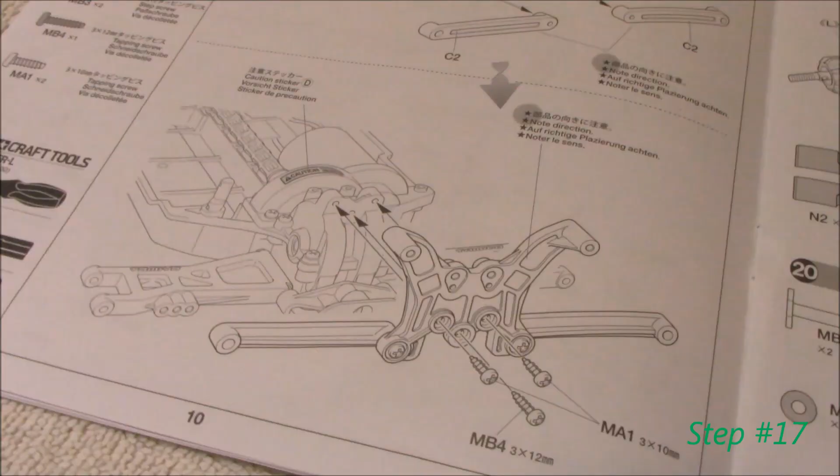Okay, so for step 17, we're going to need these parts right here.

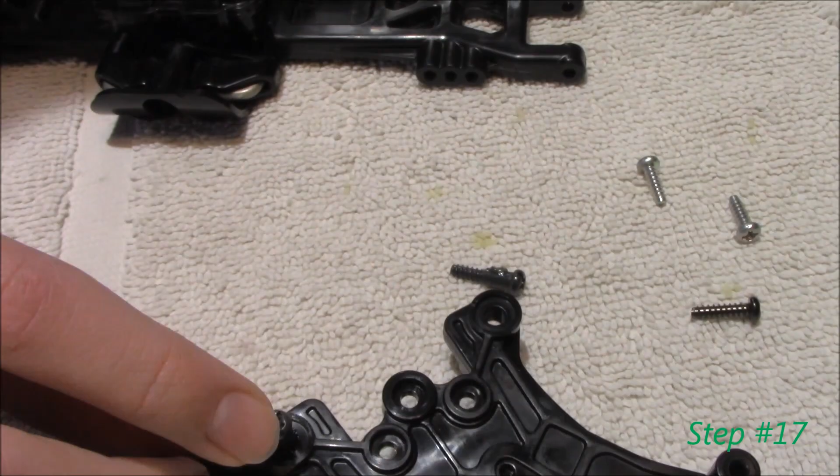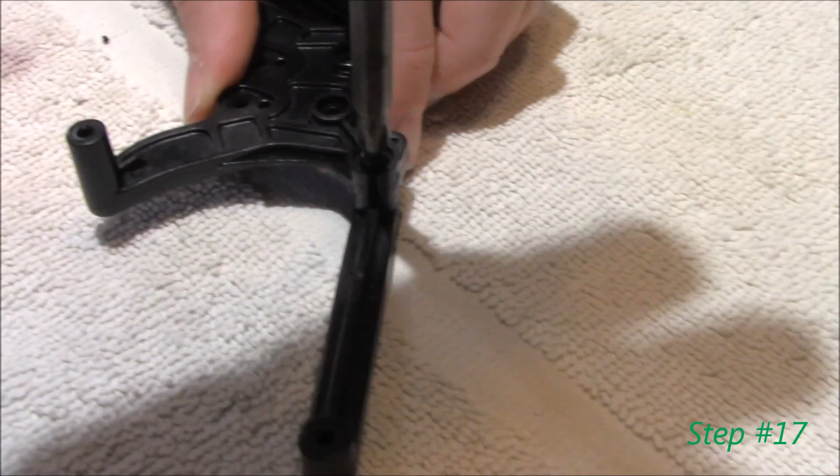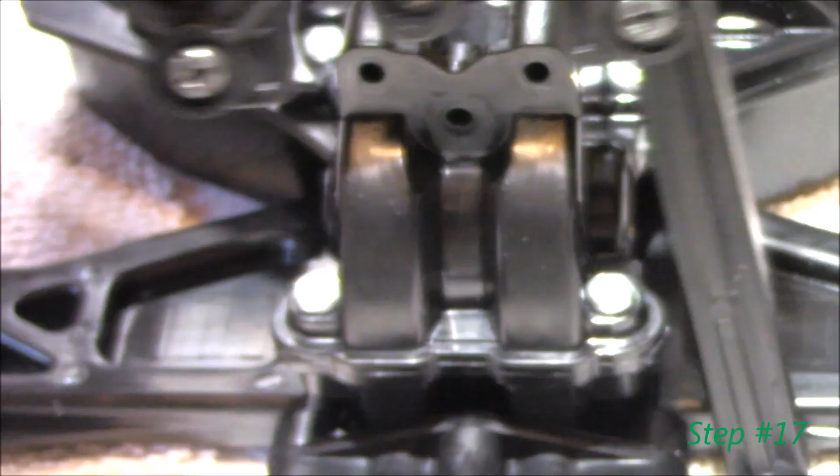Get the shock tower mounted to the back of the vehicle. The black one goes right in the center there, okay? It's a longer screw than the other ones.

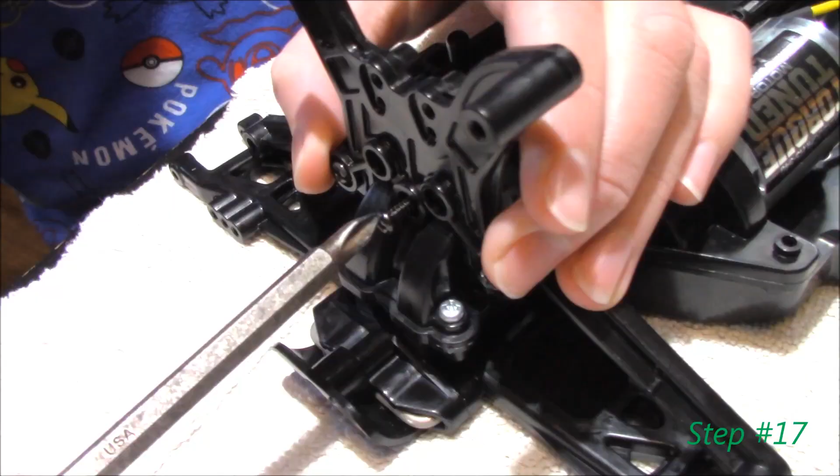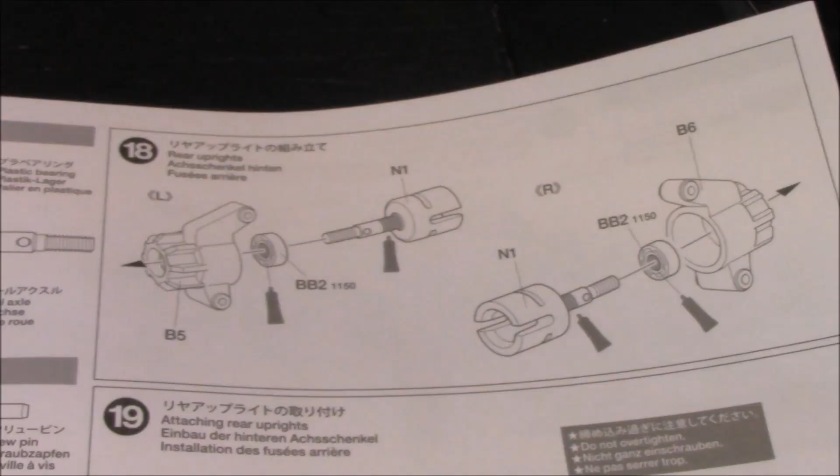Our next step is to go ahead and get the rear uprights put together. Alright, next we're moving on to step 19, which is attaching the rear uprights, the dog bones in. First thing you gotta do is grease everything up.

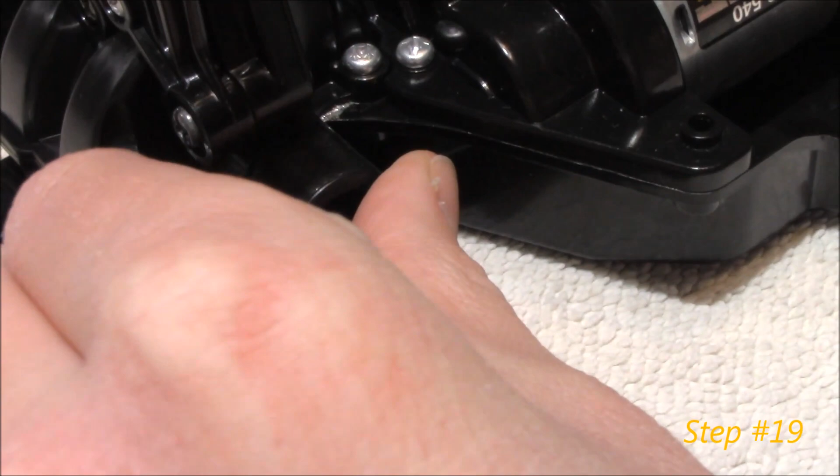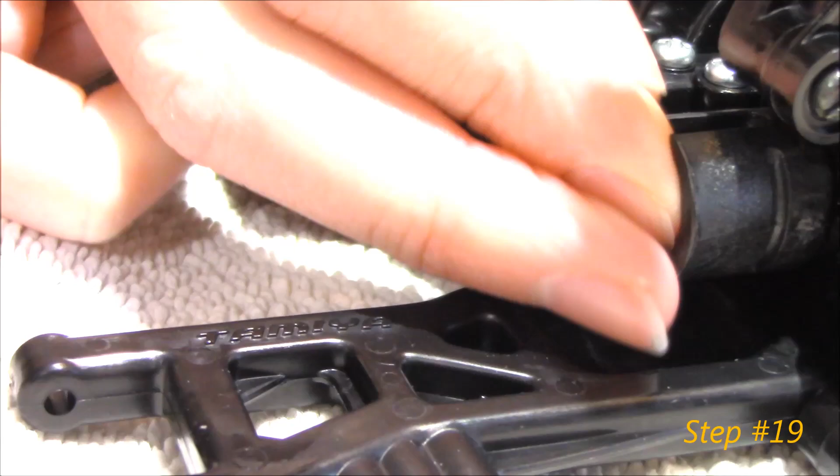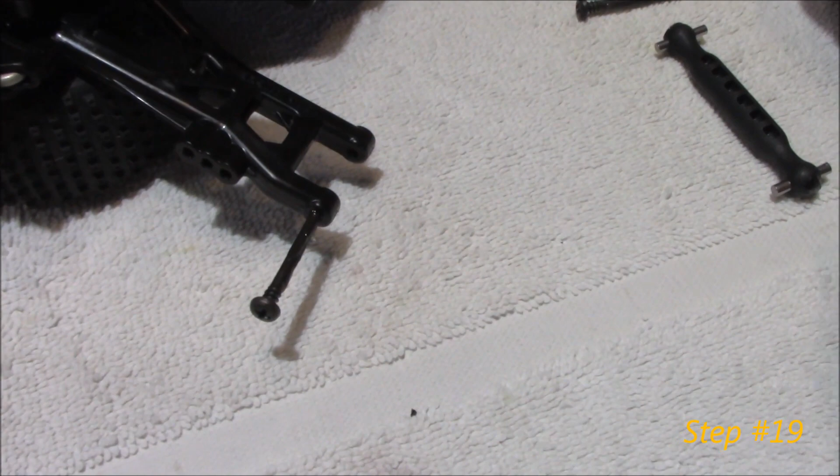All right, go ahead and get that back hub put on, the right one. Get that back one, you got to make sure that they're the right way, that you've got it right there. Okay, go ahead and get that dog bone in.

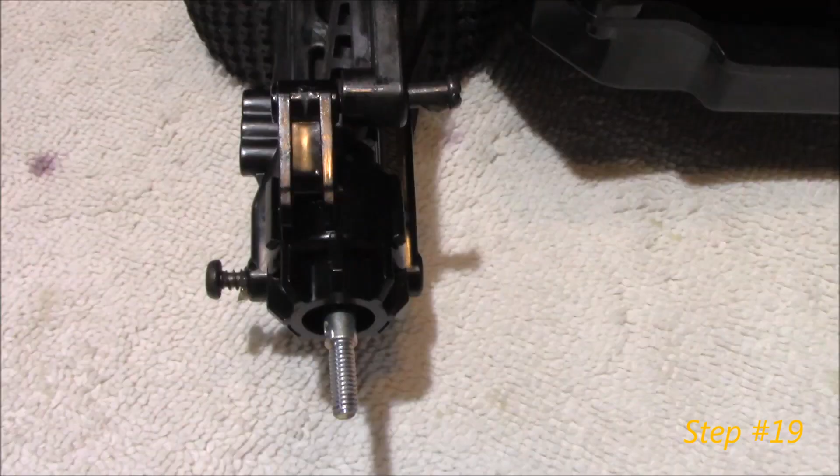Okay, get your screw in that one. We'll get that tightened down. So now you can see if you don't have the right hub in there, it won't line up with this upper arm. So make sure you check that.

Now we'll go ahead and we'll get the other side done.

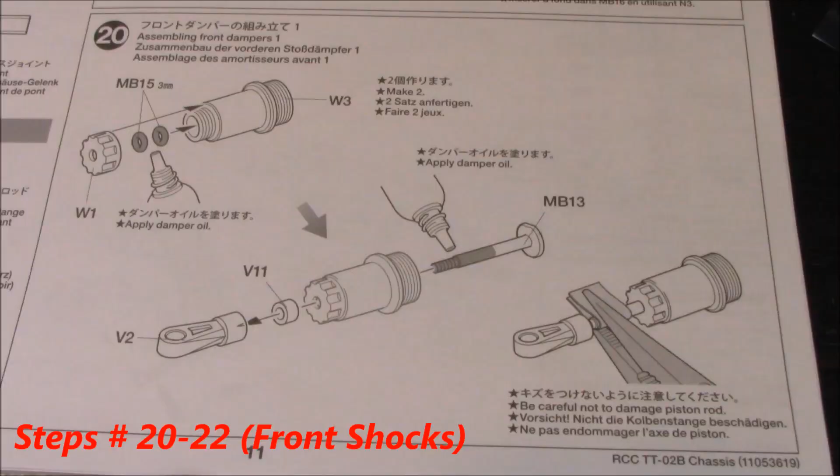So let's go ahead and get all the shock parts rounded up, Nathaniel. And here's all the parts you're going to need for step number 20, which is to build the bottom half of the front shocks.

Put a little bit of oil on that. It tells you to oil the shaft. Seals in there.

Alright, got some oil on that. Pull that through.

This tool here, but if you don't have it, you could just use your pliers like it's telling you with a towel or something wrapped around it. We'll go ahead and get these tightened down.

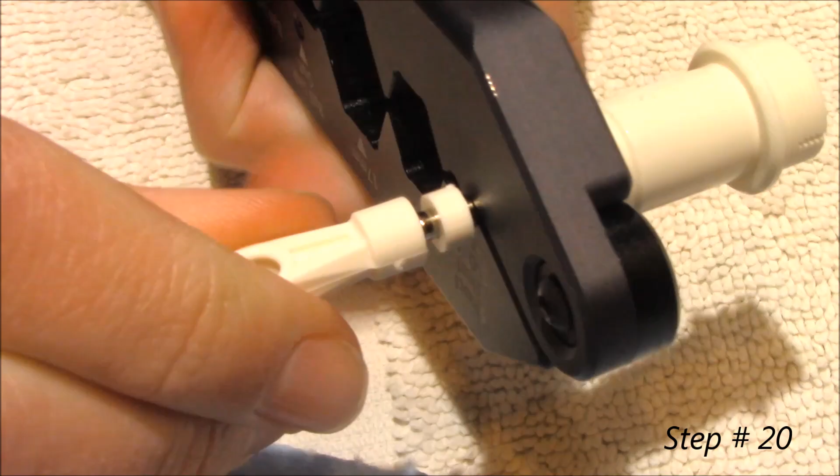We got step 20 done. Now we're going to move on to 21, which is to fill the shocks with oil and put the caps on them. So I gotta imagine this is going to be a messy step. Here's the parts you'll need for step 21.

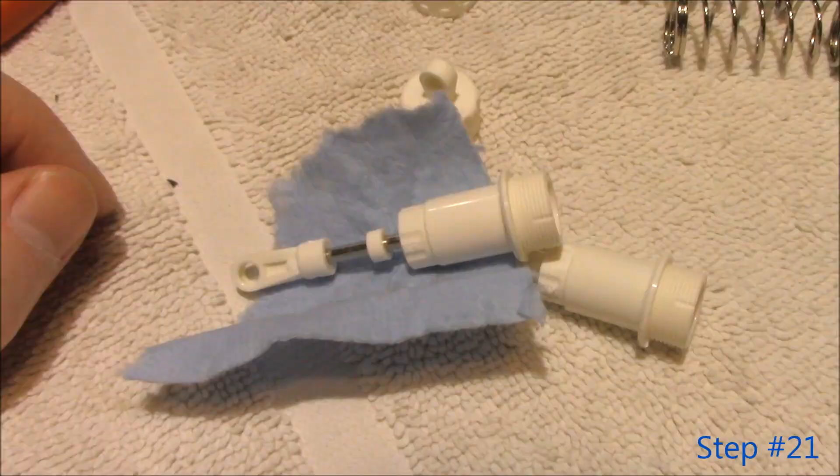Okay, so to fill these with oil, you need a rag around there. Just keep your fingers clean. Pull that piston all the way down. Go ahead and pick it up. Wrap that around there.

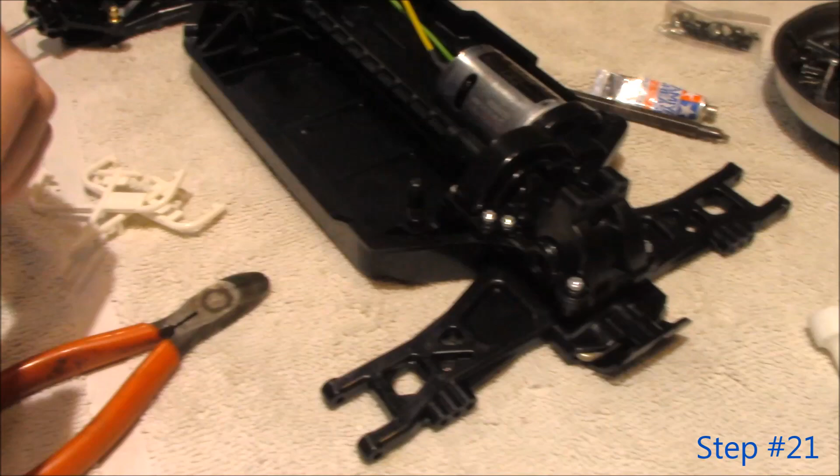Okay, now take your oil. Slowly fill that up. Alright, we're going to go ahead and move the piston up and down real slow just to see if there's any air in there that we can get out.

It doesn't look like it, so it's moving freely. So we'll go ahead and we'll put the green cap on there. And then we'll put our shock cap on there. Turn it down pretty tight, but they're just plastic, so be careful. Alright, feels nice.

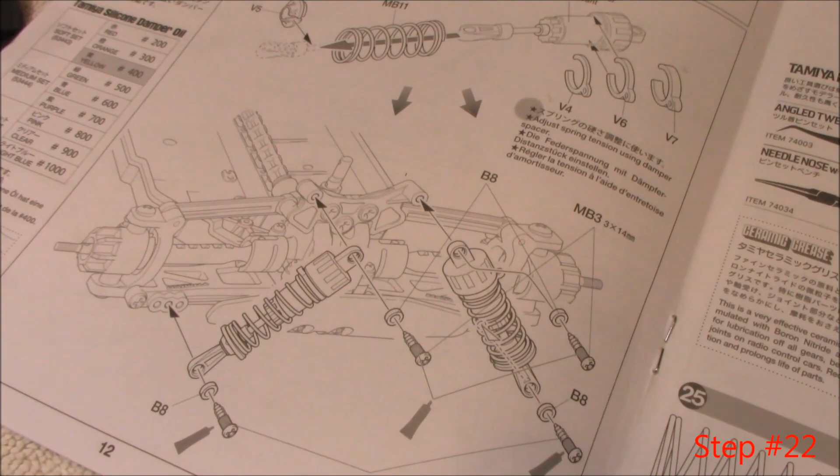Alright, now we're on step 22, which is going to be finished assembling the shocks and get them mounted to the front suspension. Okay, so here's all the parts for step 22. Let's go ahead and get the shocks together and get them mounted up. Alright, so pick it up, put that spring on there.

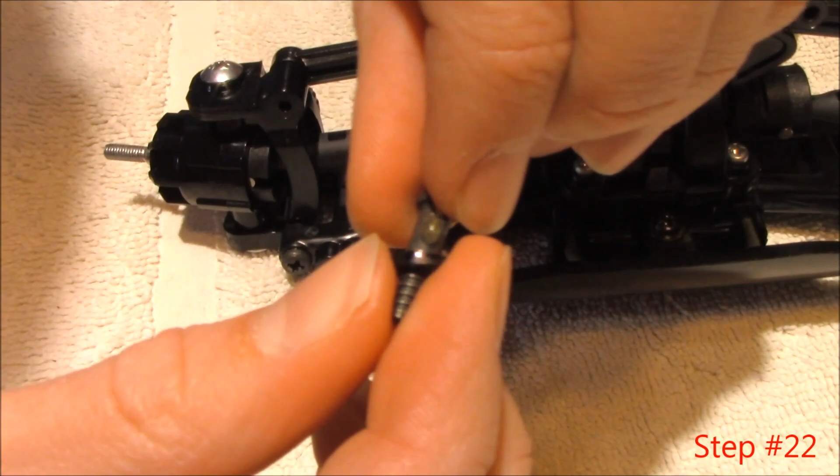Alright, we'll get that shock mounted up then.

Okay, and then the bottom's got 3 holes there. It tells you to put it on the farthest hole. We'll go ahead and put it on the most inner one. That way we get the highest ride height. This car sits really low to the ground, so might as well have as much height as we can get out of it.

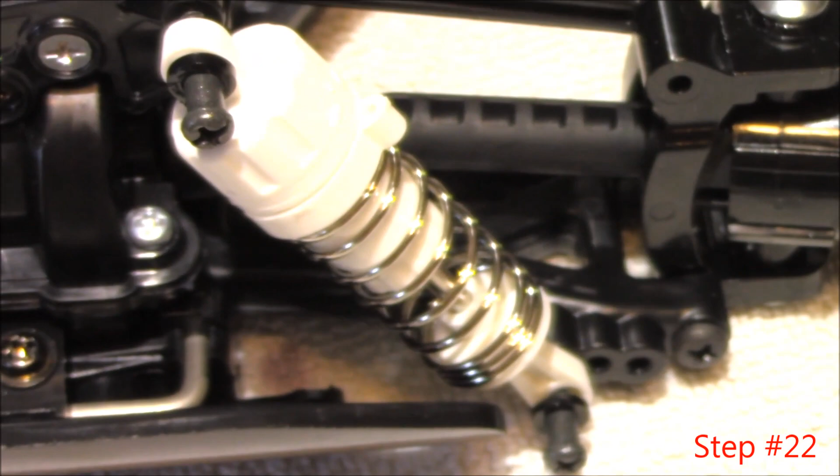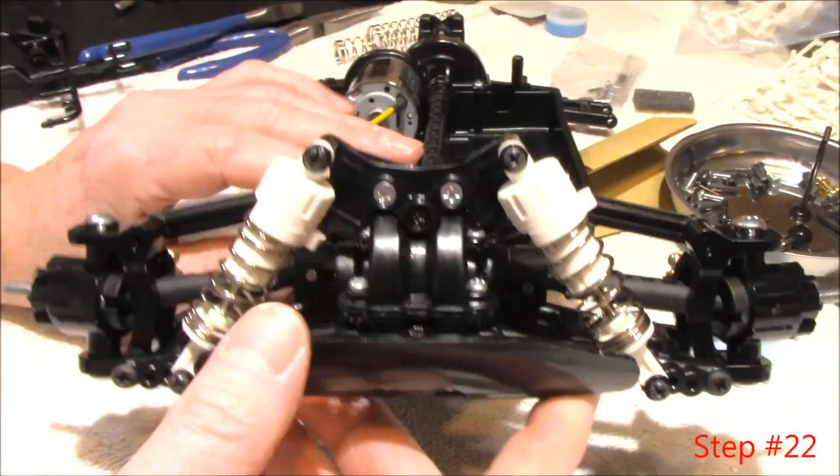Alright, step 23 is basically doing the same thing on the back, and so we'll go ahead and get the rear shocks assembled.

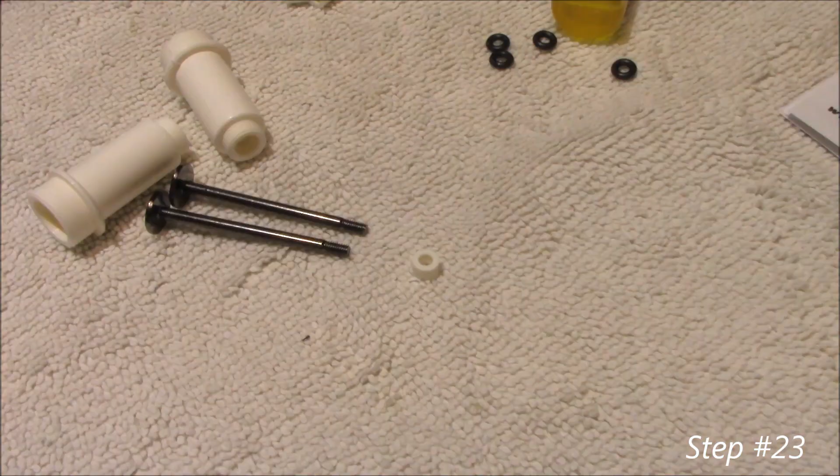So on these shocks, these get a little bushing on each shaft, unlike the other ones.

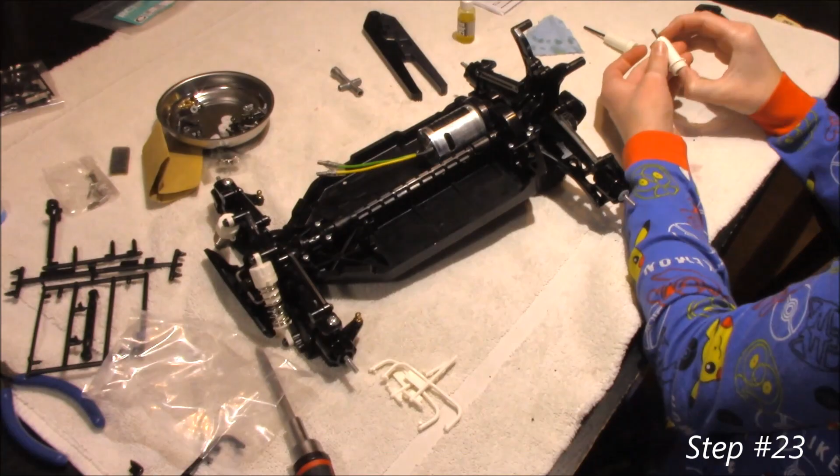Alright, go ahead and put the O-rings in the bottom of the dampers, 2 of them right on top of each other. Spacer goes on.

And now we're on to step 24, which is just to put the oil in the shocks.

Alright, now we're on step 25, so that you're going to need your springs. Okay, remember how to do this from before? Go ahead and put your spring on there.

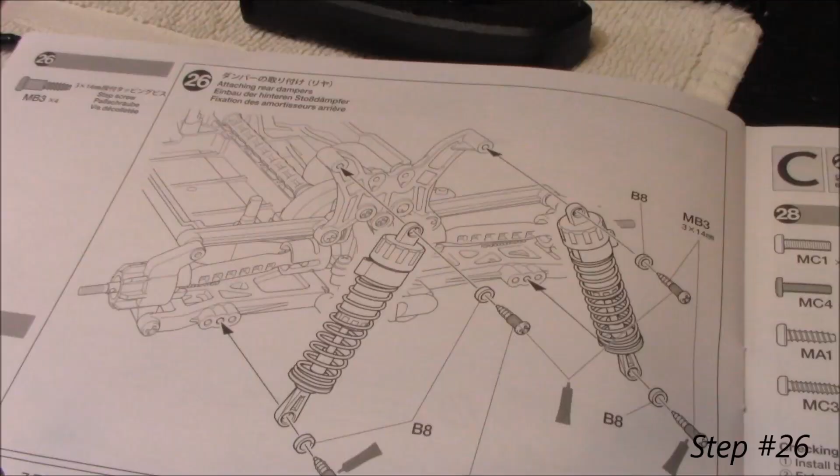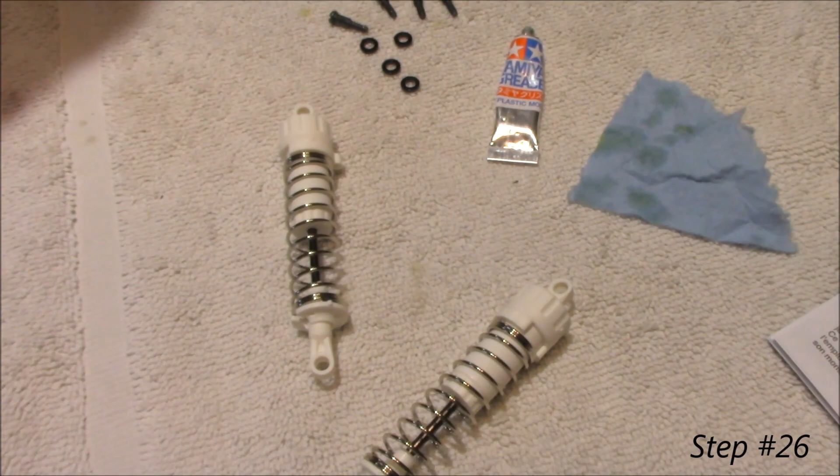Alright, step 26. We'll go ahead and get the rear dampers, the rear shocks put on the car. Here's what you're going to need, your 2 shocks and those parts right there. We'll go ahead and put a little bit of oil on those, or grease.

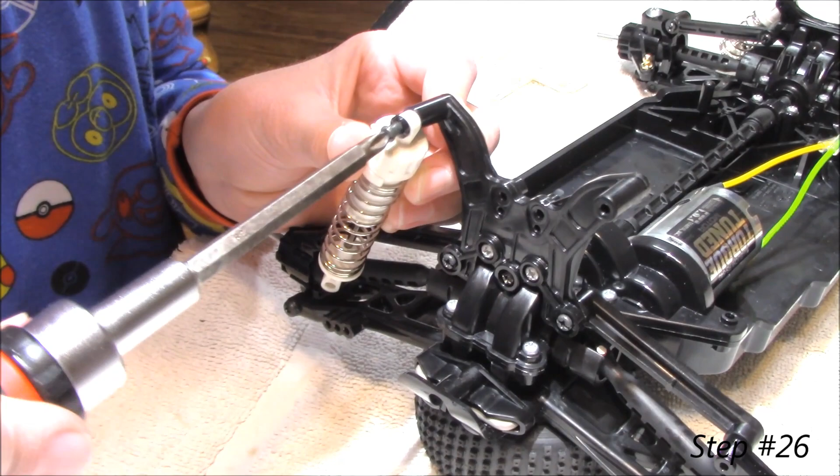Alright, let's get our damper on. You don't have to get it all the way in yet, but just tighten it so it doesn't fall off. Alright, that's good. Now go ahead and get the bottom one.

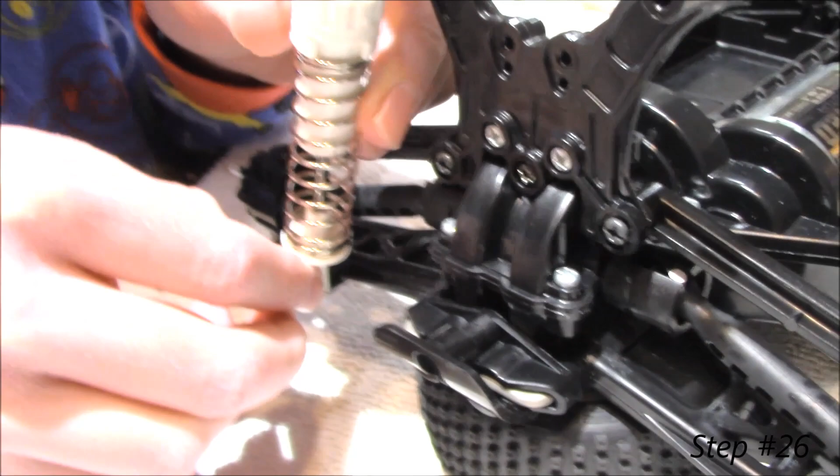We'll put it on the innermost hole right there. There you go. That'll give us the most travel. These cars sit really low to the ground, so you can always adjust it if you don't like it that way. So we'll get both of those tightened down and we'll put the other side on and do the same thing.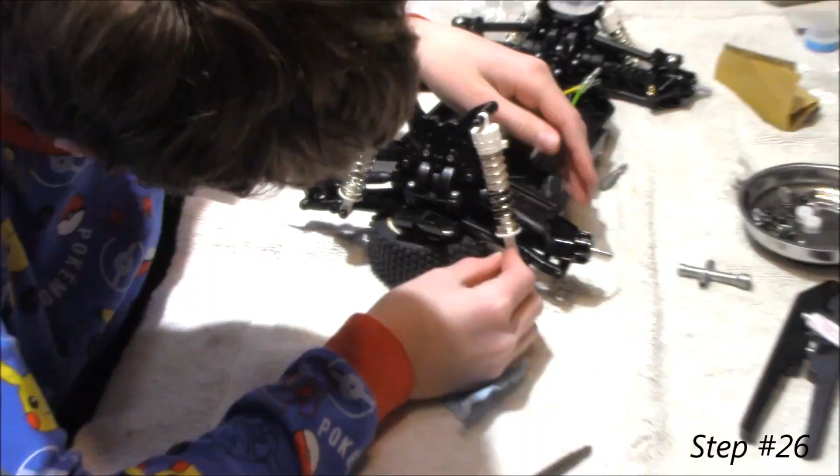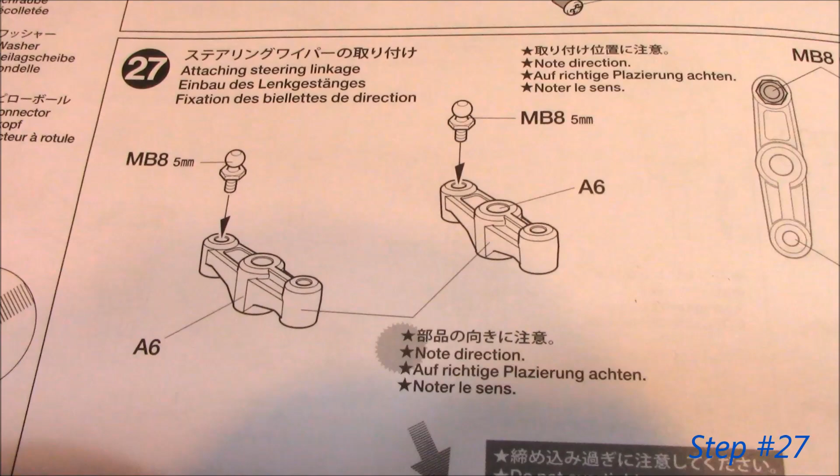Alright, now we're on to step 27, which is to put the steering linkage on there. There's the parts we're going to need, so we'll go ahead and get the little ball studs on there. For the ball studs you got to make sure that you're putting them on the steering arms in the right direction, on the right side.

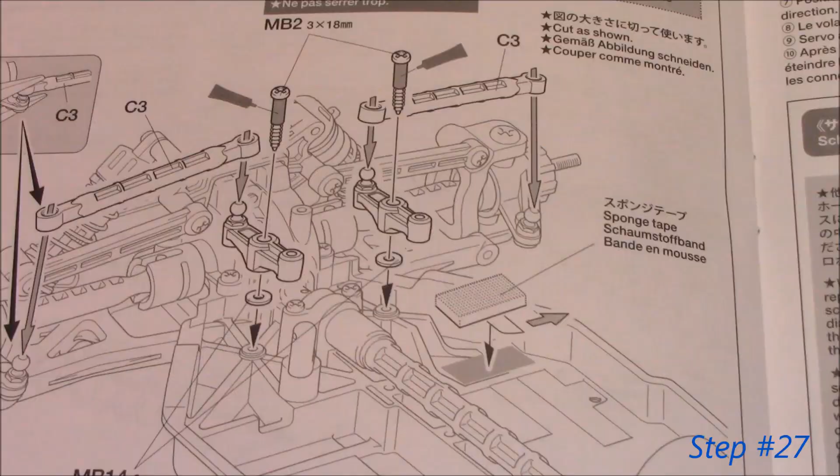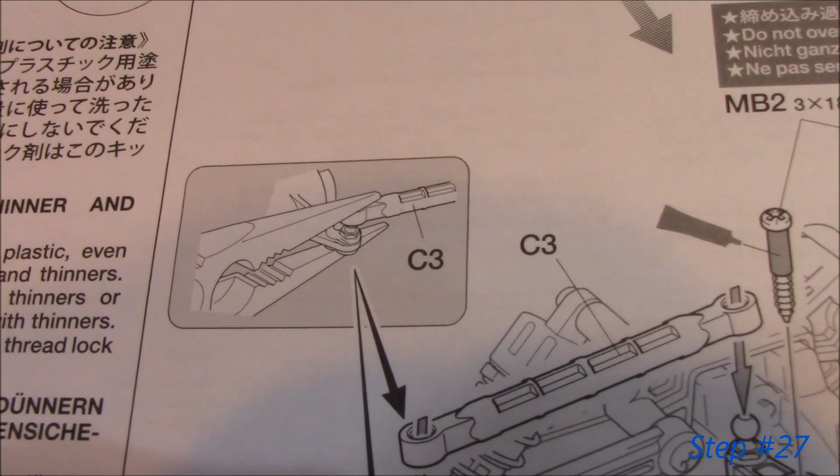So that actually started pretty easily. Okay, now we got to get that ball end into that tie rod there. Alright, so we got one attached, and they tell you to use needle nose pliers in the instructions, which is not, in my opinion, the easiest way to get them on there, so I found a pair of pliers works the best. Alright, put it in there.

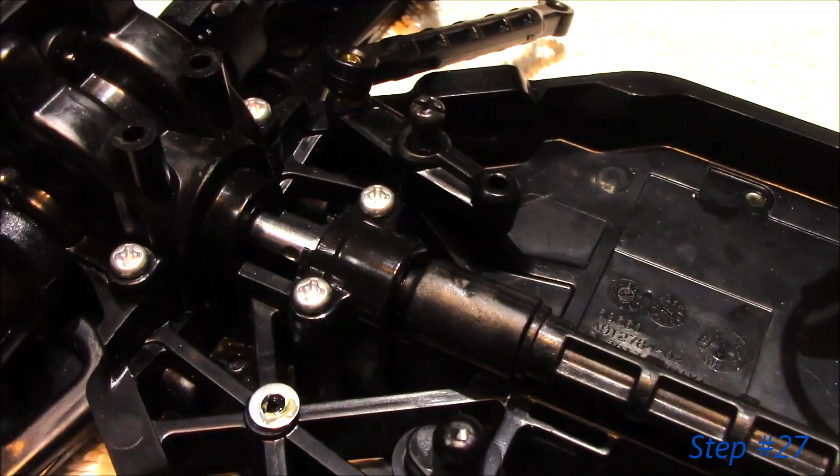Alright, I got the right linkage started here. We're going to go ahead and get the other side on there. So the first step is to put this little washer on, below that. Put your linkage on there and then feed your screw. Kind of hard to catch it on the camera, but feed the screw through that and then the arm.

It's really hard to capture, it's all black. Get her started. Now we'll screw those down.

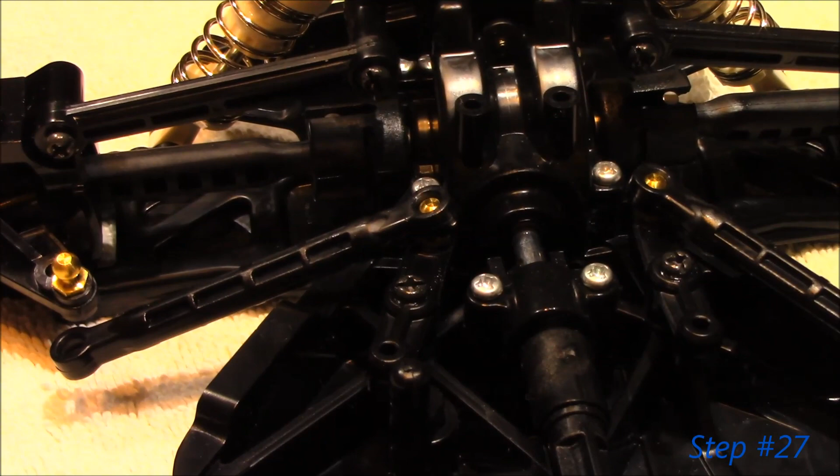Okay, so you can see that that's kind of tight, and the instructions say to loosen it just a little bit to where you have enough free play in there to where it moves freely. Okay, and the other one's kind of tight too, so we'll back it off just a hair.

Perfect. Okay, the last part of step 27 is to go ahead and attach your tie rods to your ball ends on your steering knuckles.

Alright, now we're on to step 28, which is basically to get your servo set up, and that entails getting your receiver hooked up to your speed controller and powering the system up so you can get your servo set to its midpoint, so we can get that installed in the car.

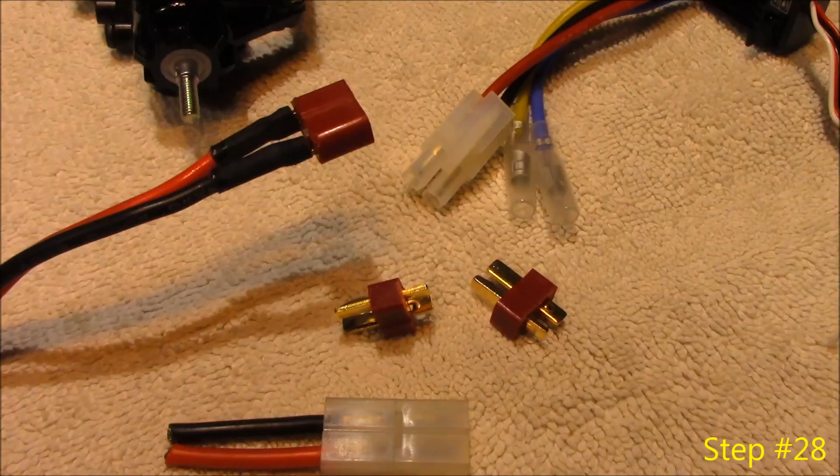Alright, so we're going to have to go outside and change out that connector on the speed controller so that it works with our Deans connector on our battery. Okay, we got the speed controller all set up. Everything's soldered on there nicely. Time to get the servo out.

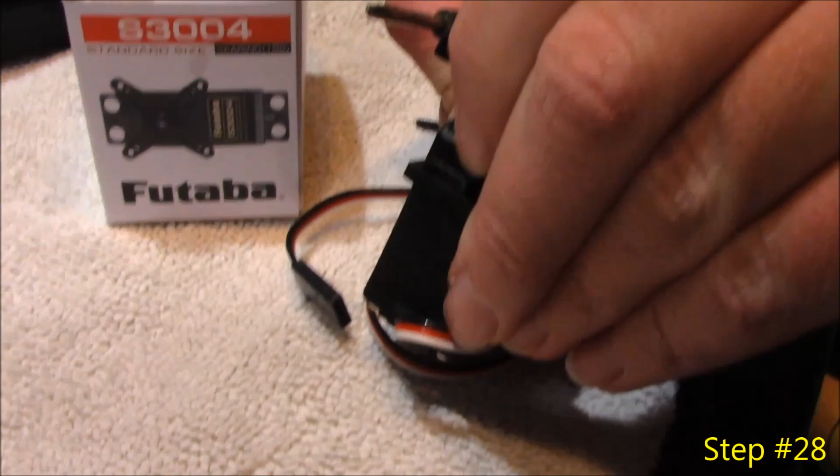Go ahead and take that servo horn that it comes with off of there. Alright, just a basic Futaba servo. This one does have ball bearings, but they're plastic gears. Should be fine for this car.

Alright, so now we're going to need our receiver. So we got that all unpacked, and we got our transmitter and our receiver here. We got to get this bound to this. Get some batteries put in it. So we're going with just a cheap little Dual RC. I've used this controller in the past and I've had no problems with it, so should be fine for this.

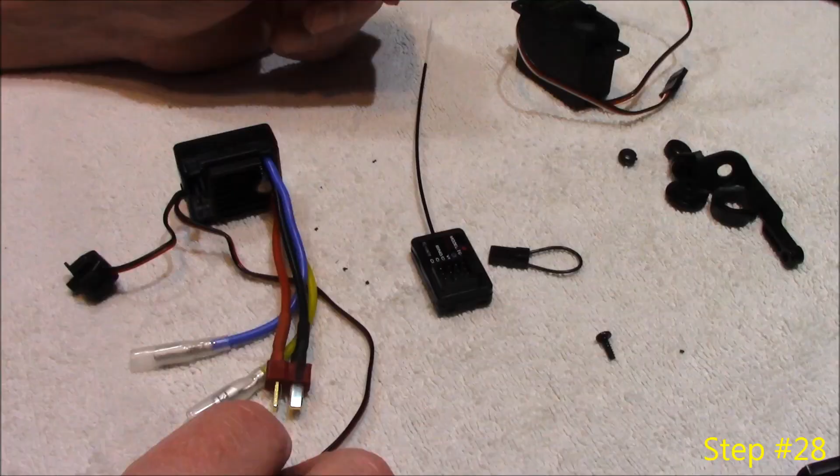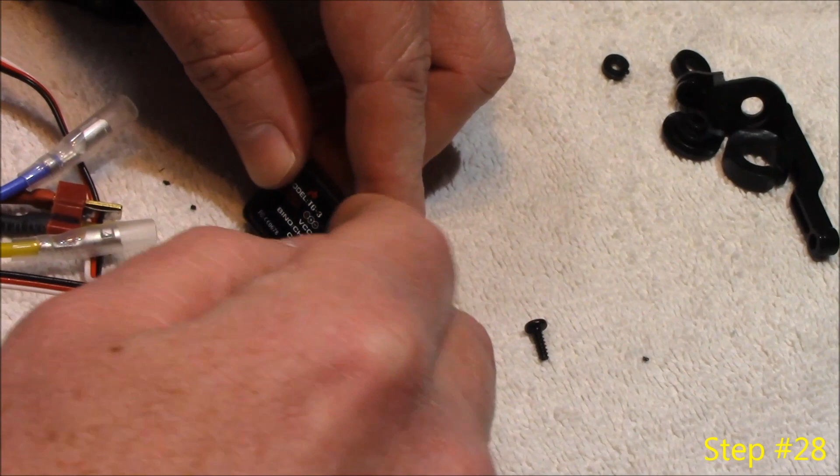Alright, so we got to get everything plugged into our receiver here before we try to bind it so we can get it powered up. Okay, we got that all hooked up. Now we got to put our bind clip in, which is channel 3 on this one, or it actually says bind on there, so we'll put that in there. Battery in.

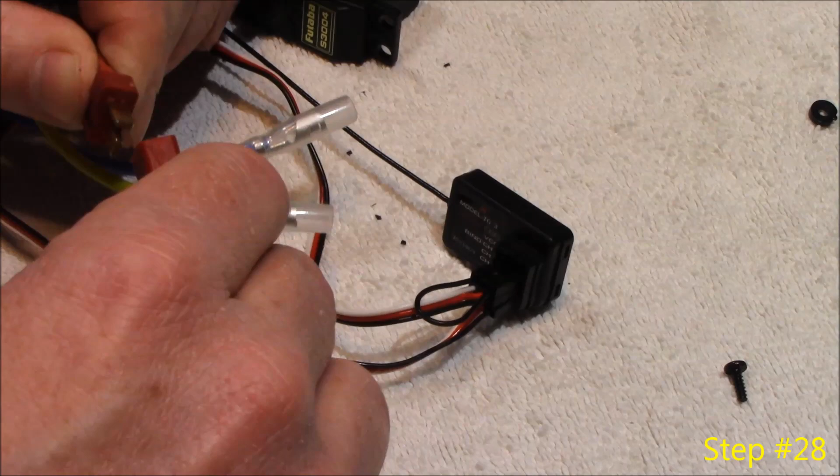Maybe. There we go, nothing smoked, so that's a good sign. Okay, after a few minutes of messing around, we finally got our receiver bound to the transmitter. So we're gonna go ahead and check the servo. It operates, we've got it centered up. We're gonna go ahead and test the throttle.

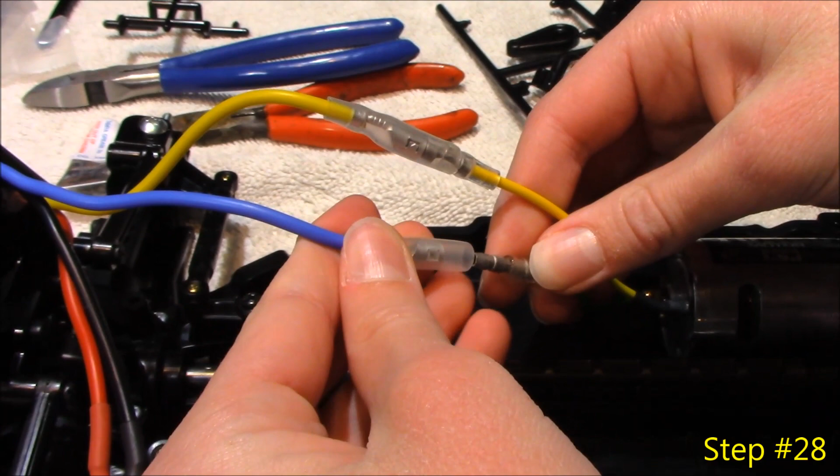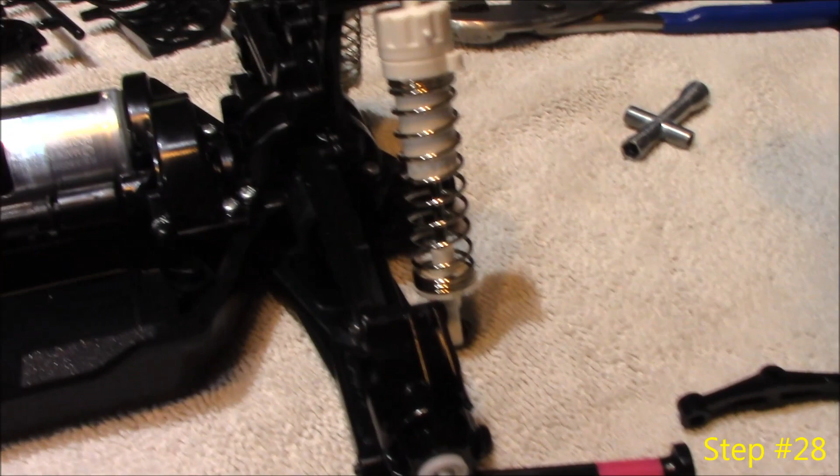So we'll hook the speed controller up to that just to go ahead and see if it works. That's good enough. And we'll go ahead and give her some throttle and see if it works. Yeah, we got forward and reverse. Looks like it's going the right direction too. That's forward. That's reverse.

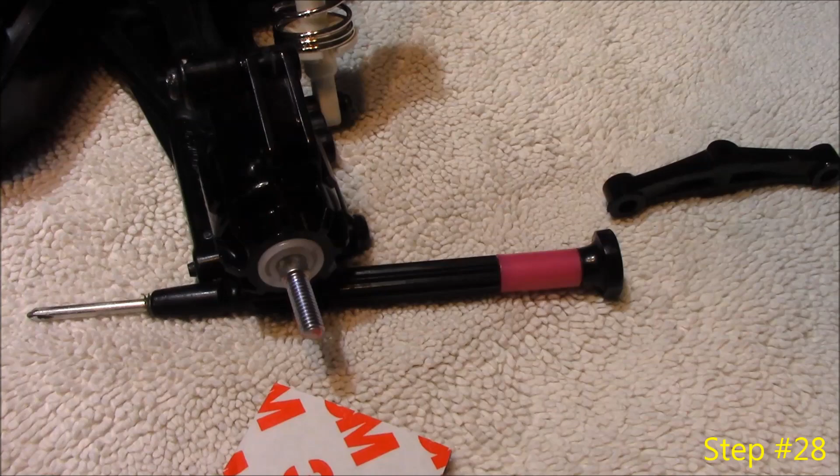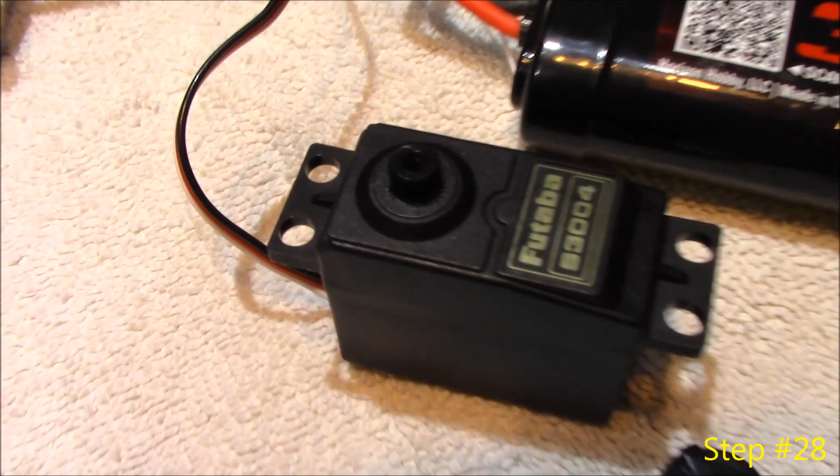Alright, let's see if we can get the servo in. Alright, so we got this, the servo is all centered. We're going to go ahead and put the servo saver on it. So according to the instructions, you put the servo saver in that position with the servo mounted like that. Put the horn facing up, so go ahead and put that together, Nathaniel.

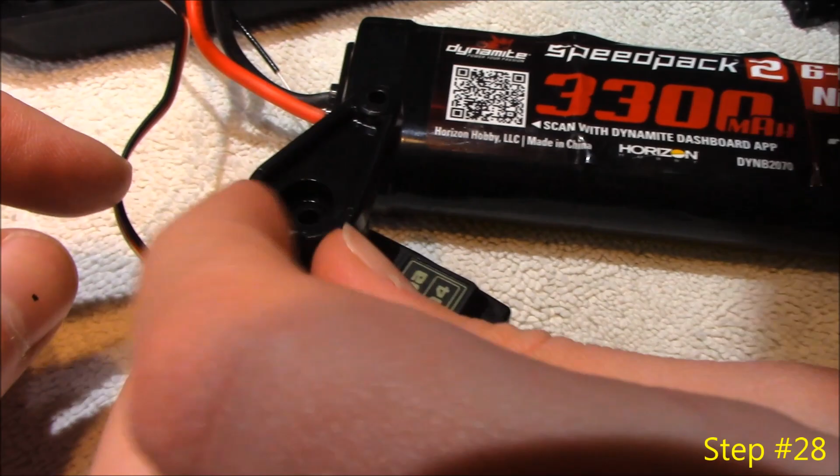So you want that, nope, you want it completely vertical. There you go, just like that. That spacer in there, the little washer. Okay, make your screw.

Alright, we're done with step 28. We're going to go ahead and move on to step 29, which is getting everything mounted to the servo. Alright, so we got all our parts laid out for step 29. First thing we got to do is get these little bushings put into the steering rod.

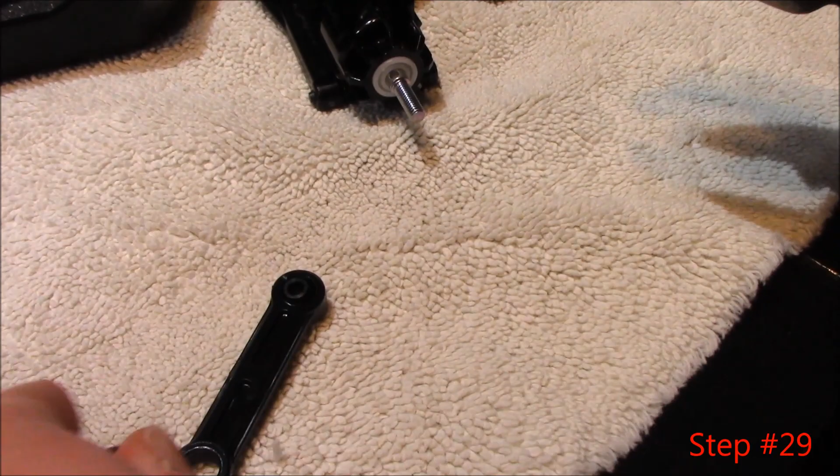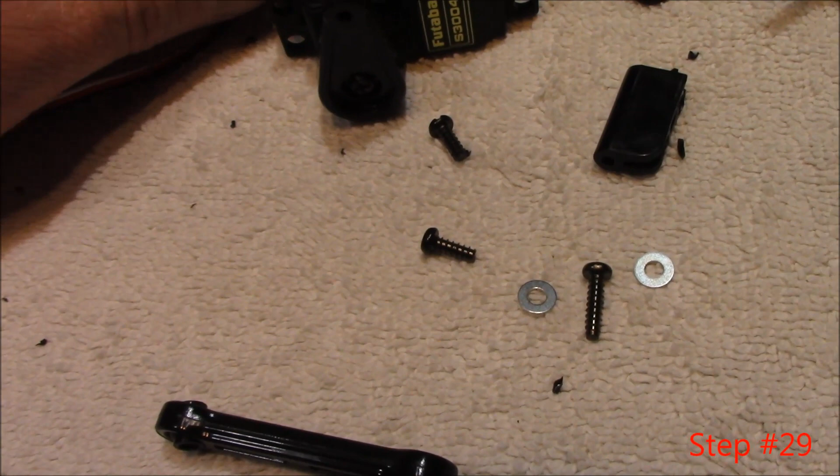Next, we're going to go ahead and get these servo mounts mounted to the servo. Alright, so we've got the one side mounted up. We're going to go ahead and put the other servo mount on the servo. So the curved side, according to the instructions, actually faces the servo.

Okay, so the next step is we're going to, nope, not there, we're going to screw this arm to the back side of that servo saver. Alright, next is to go ahead and mount this to this sliding steering bar, whatever they want to call it.

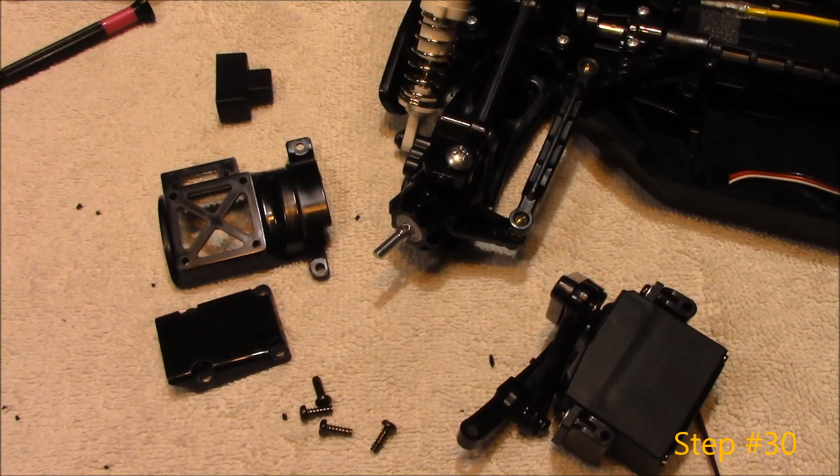Here's the step, here's all the pieces you'll need for step 30, which involves mounting your servo onto the chassis. This foam piece here that we left out earlier, I think I'm going to go ahead and mount it in there. It gets taped, stuck right there, and your servo gets mounted in there. I think what that foam piece does is protect your servo saver, kind of rubbing on the bottom and keeping dirt out of it. That's my guess, so we'll go ahead and mount everything up there.

Step 30 also has you putting this engine, the motor guard, on there. I don't think we're going to put that on. I think we're going to leave that off. It's set up for if you're running a brushless motor or want to put a cooling fan on it. We're not going to do that, so I'm just going to leave that part off.

Next step is to get the servo mounted onto the chassis. We're going to put these two screws through the chassis, through those two holes there, and then into the servo saver, where the servo mounts.

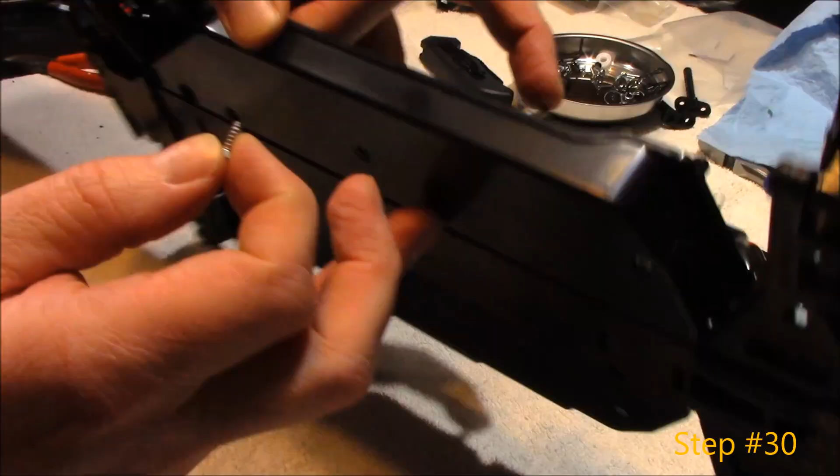Next step is to get the linkage hooked up to the servo. Okay, everything works good. Got the servo hooked up and everything powered up. Just checking it before we move on.

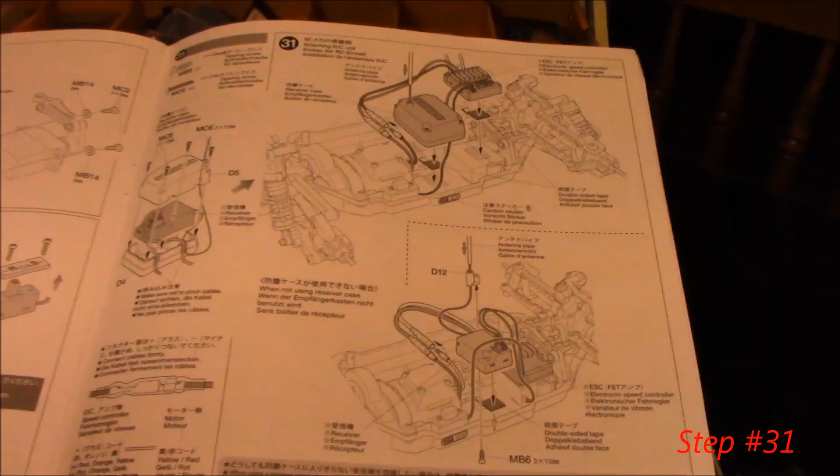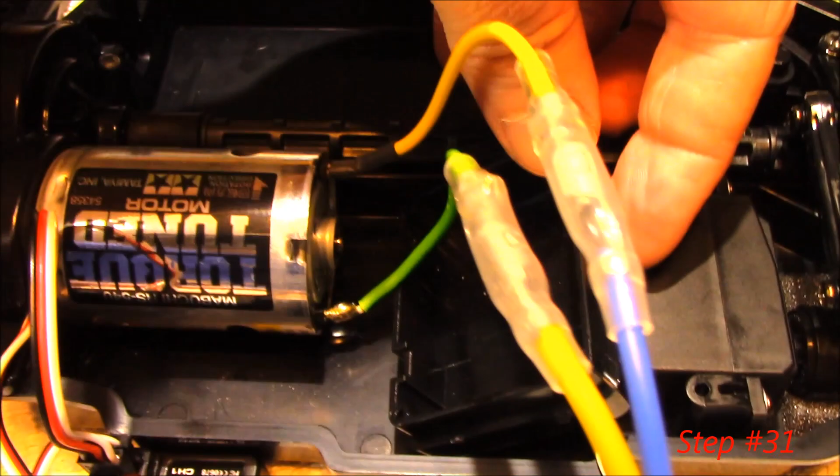Moving on to step 31, which is installing all the electronics and the antenna. It has you putting your receiver in this box, mounted with servo tape right in there. I'm not even going to put that in there, it's so tight you've got to bend these motor wires almost straight over to get it in. I'm not too worried about that receiver, so I'm going to skip it. But I am going to clean the surface of the servo and chassis with some alcohol so the double-sided sticky tape sticks well.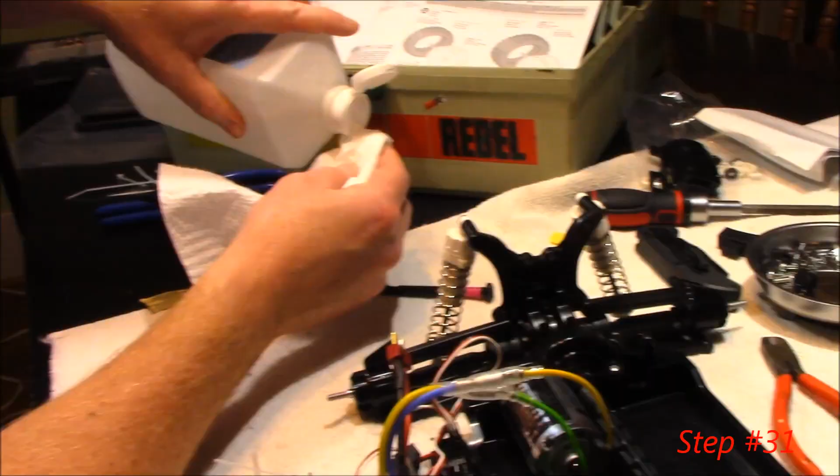Now we got to figure out how we want to put this receiver in here. We'll have the antenna right there, so we'll probably mount it there, and then put the on/off switch, probably mounted on the side of the chassis right there.

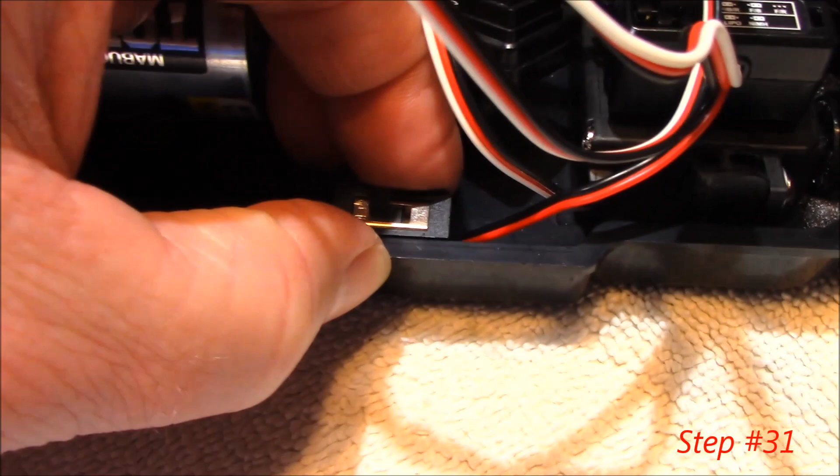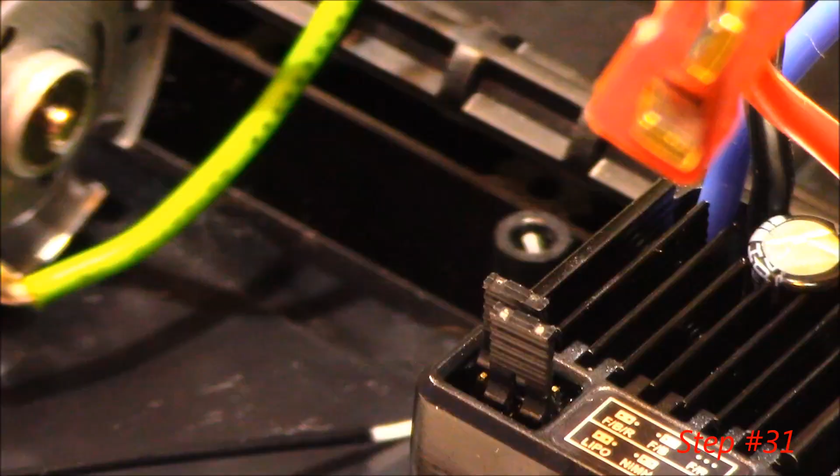Now we'll get our sticky tape and get that taped down. Now we'll carefully put that down straight. That's good.

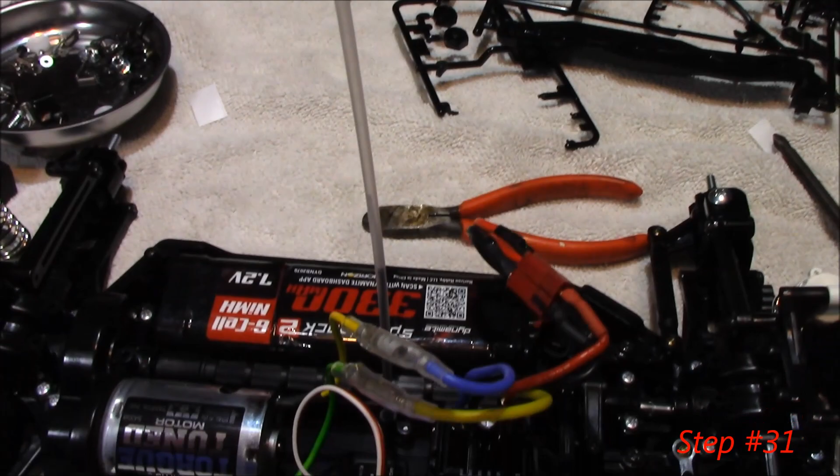Okay, we got it together. Now we're going to tidy the wires up, put the battery in there, and actually put the antenna tube on there. We'll probably end up cutting that down anyway once we get the body cut out and painted. Everything's tidied up in there - hopefully these wires sit down once we get the shell on there. But everything looks good, so next step is 32, to go ahead and get the tires and wheels mounted.

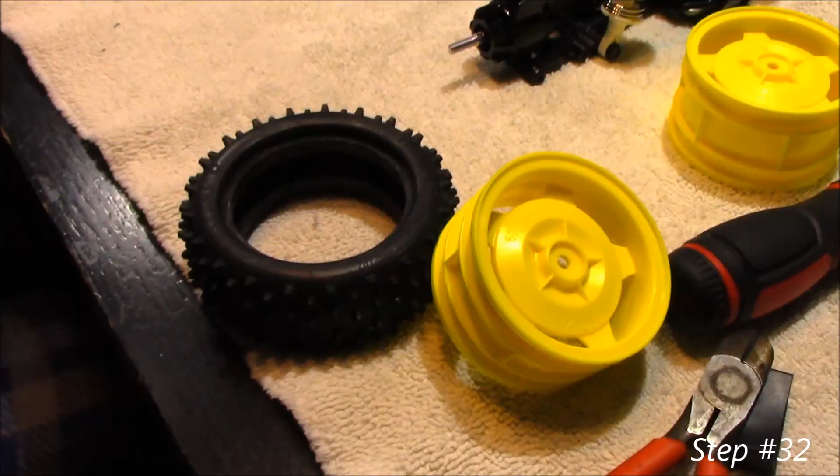Alright, all 4 tires are done. I can't feel my fingers now, but they're all on there.

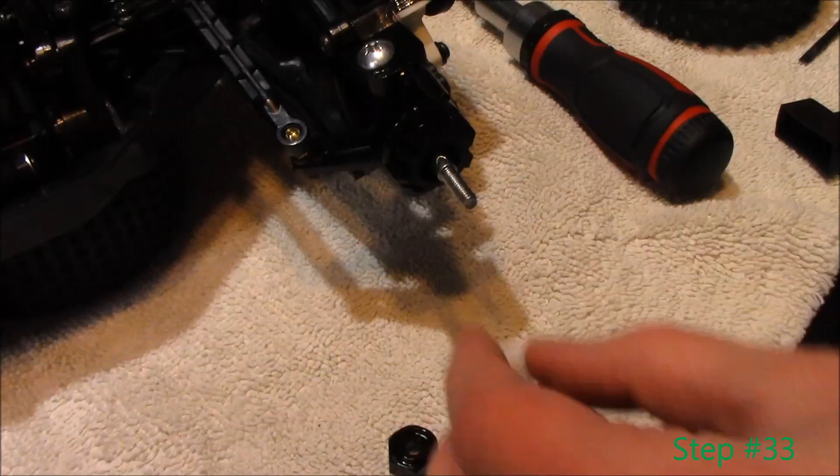We're going to move on to step 33, which is putting the remainder of the bushings in there and getting your 12mm hexes put on your axles. Okay, put the bushing in there - now we're going to swap those out with bearings later, but for now we'll just get it together with these.

Alright, we got the tires on there. We're ready for step 34, which is the battery tray, the body mounts, and the wing mount. That's for your battery. Okay, here's the wing mount - it's going to go on the back of the shock tower. There are 2 little notches that go into the notches on the shock tower. Go ahead and put those on there.

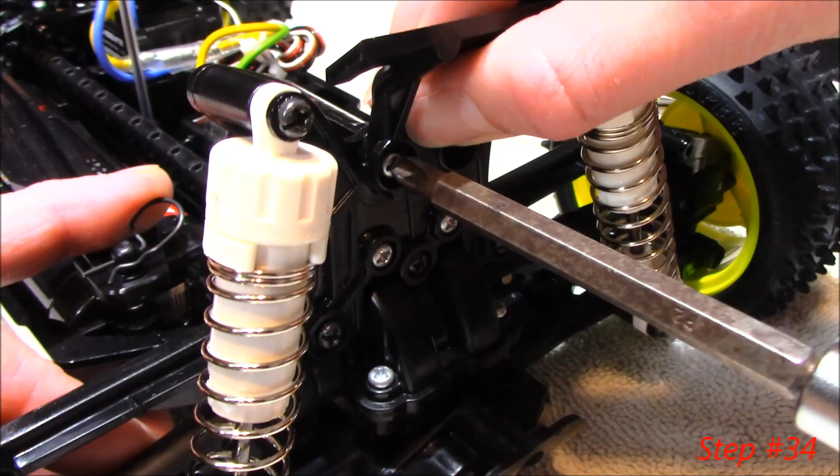Okay, we'll get the body mounts put on there. Alright, we'll get the front mount on there.

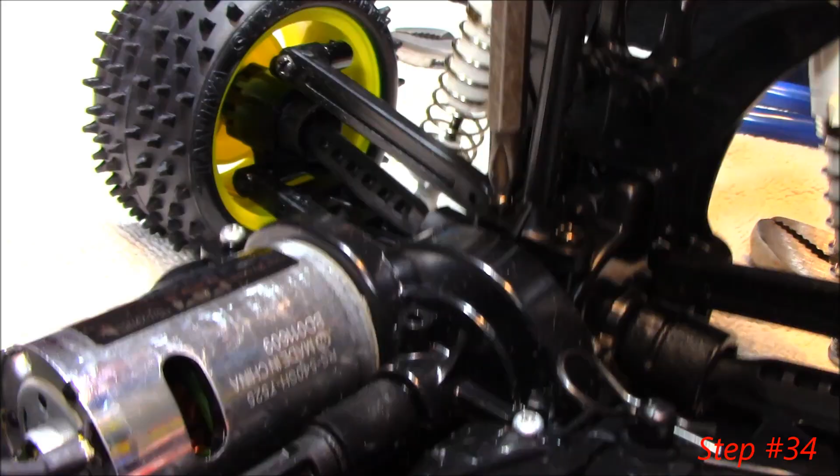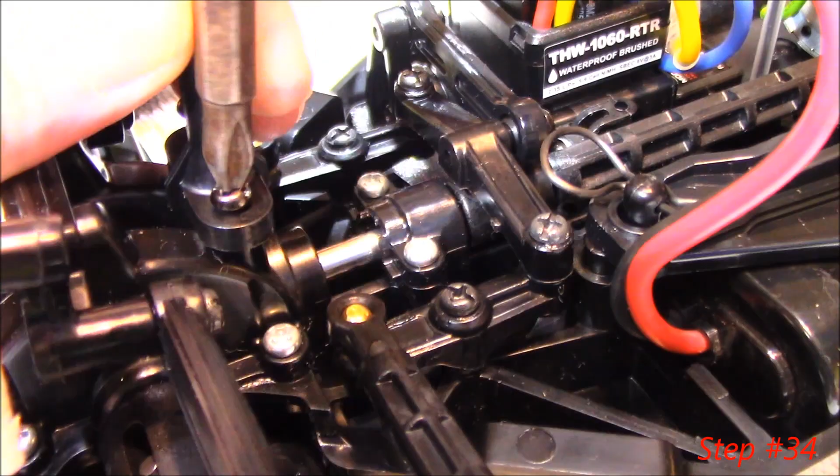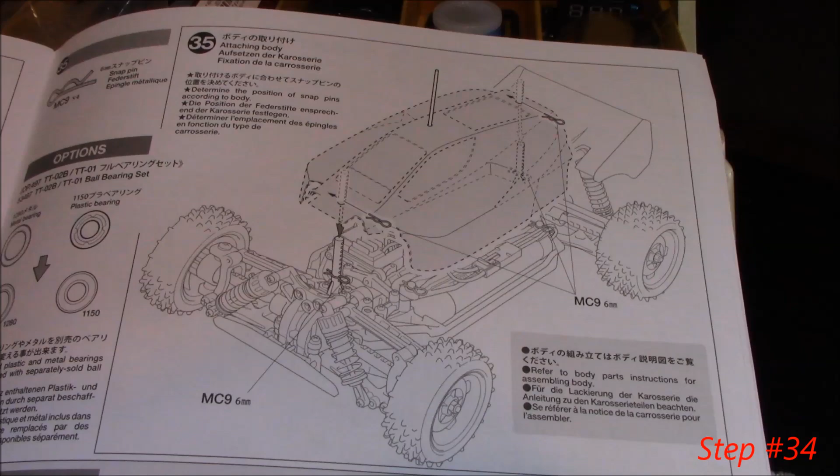This is the only piece left over from step 34. It actually goes on the wing once we get it painted and cut out, so we'll save that for later. But it goes on the wing mount. So that is the last step, 34, other than 35, which is to go ahead and cut the body out and mount it and paint it and everything. It's getting late, so we won't do that tonight.

But I did notice on these body mount posts, the instructions tell you to just put a pin in here, and the body actually just rests on that, which is really going to scratch the body up. So I've got some of these body washers - I think when we actually get the body painted up, we'll put that on there first, and then the body will go on, and then another pin will go on top to hold the body on. It'll just be a better setup and won't be quite as hard on the paint. So that'll be my plan for those. But yeah, we're done for now until we get the body cut out and painted up.